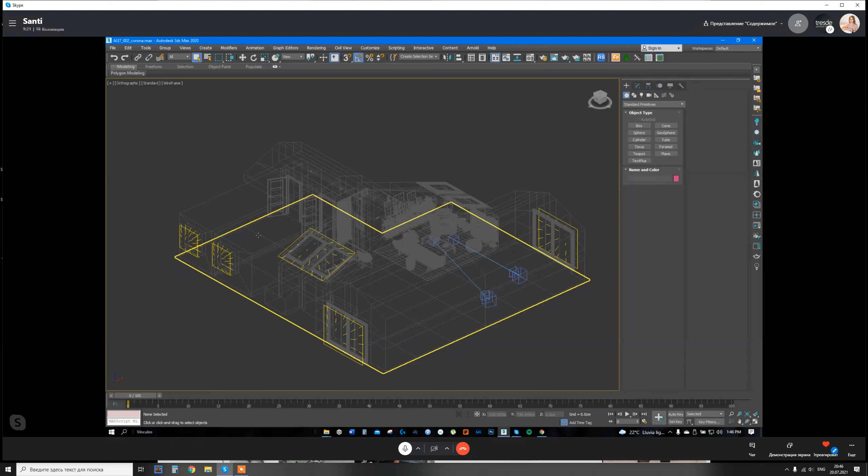What's really interesting about this project is that I decided to use this scene from Evermotion, because if you pay attention, it's the full flat model, like the full apartment. We have the room, the bedrooms at the background, here the living area, and here on the left is the kitchen area. It's almost the full apartment.

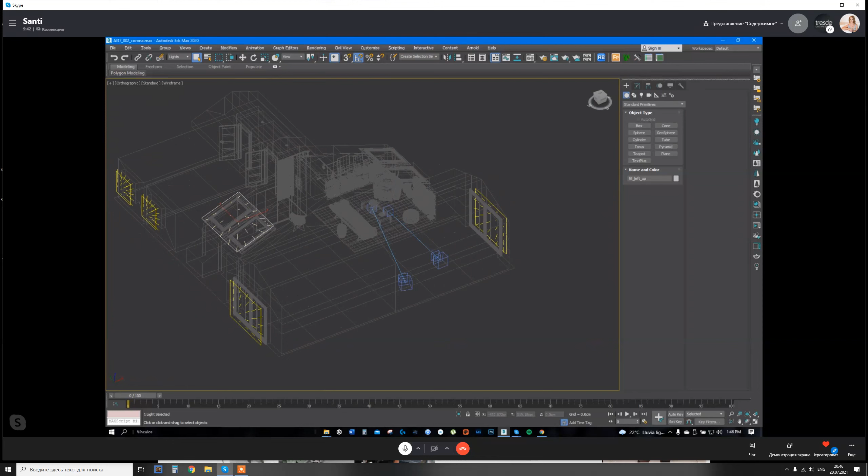As you can see, I already put some artificial lights in the light entrances, but plain. I didn't put anything here in the area where I'm going to take the render, which is the living area.

I think it will be maximum natural about the lighting, how it's going on by the place with the shape of architecture, because here is going to go inside the environmental light, the HDRI light.

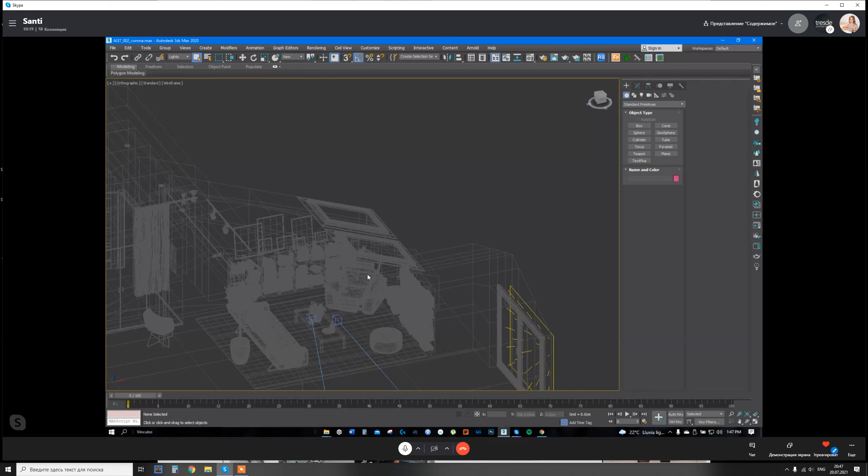That is the reason why I'm not putting anything here - the light from the environment, the HDRI, is going to go through these windows. For the other windows, I created another kind of lights, called light planes. I'm going to explain that right now.

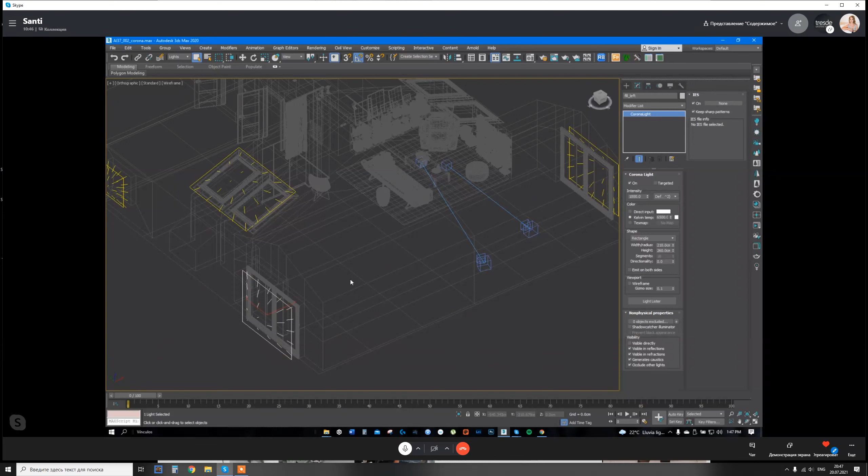These rectangle lights are called helper lights, or also fill lights. These fill lights help you control the light in a very indirect way, so it's not necessary to model the full interior. As long as you put these fill lights far away from the camera, and you don't see the light emitters in the composition.

This is the composition, but I'm not seeing the highlights directly. So in other words, don't put any light in front of the camera - just try to put it on one side, at the back, or in the upper part. The idea is these lights must affect the scene in a very indirect way.

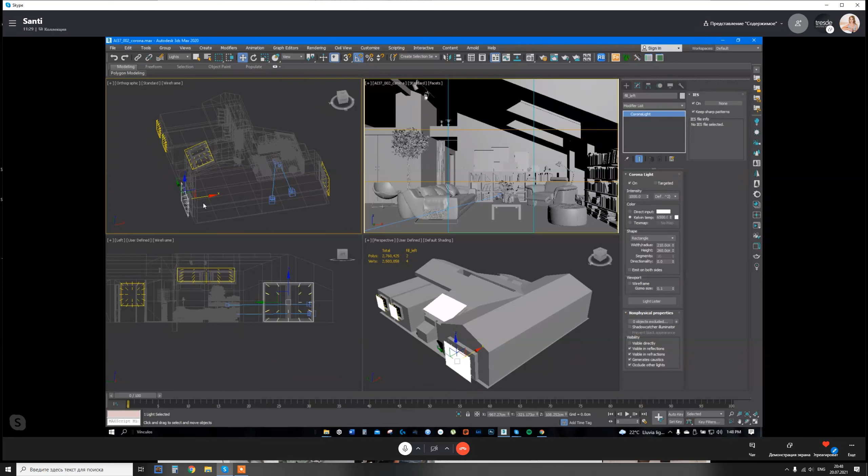The setup of these lights is very simple. We need to follow two things: first, the intensity must be really high, as you can see, 1,000. And the Kelvin temperature must be absolutely neutral - no warm, no cold. As an optional change, you can disable the visible directly option.

These lights are better when they are invisible. So I repeat exactly the same setup in all these lights.

Of course, I have lights in the ceiling like this one - little spheres. I have light here inside the lamp.

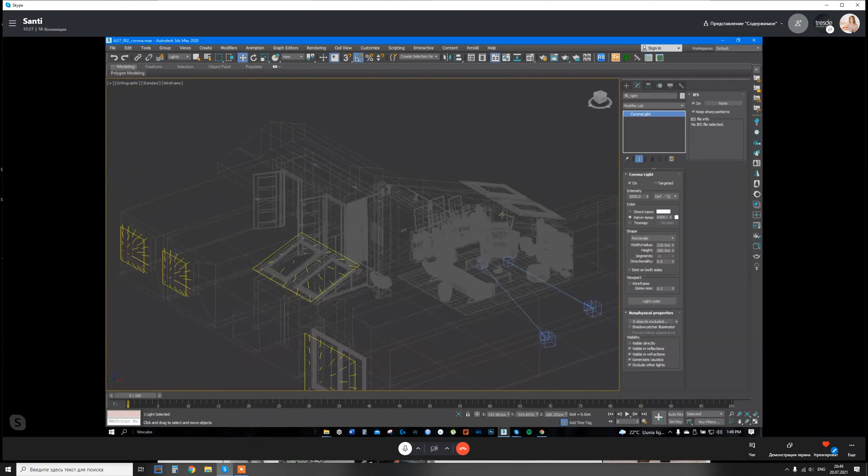It's important to give a name to every single light that you're going to use. For example, I call this one fill left up, this one fill left, this one fill right, etc. It's important to do that.

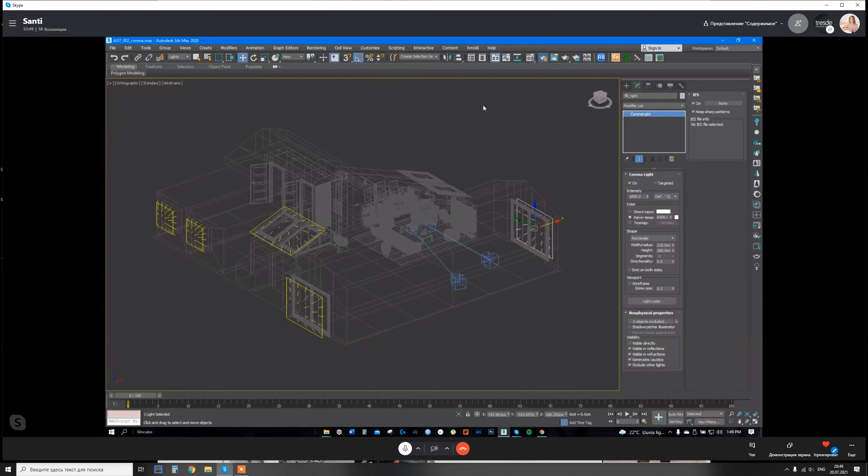Now let's jump to the Corona render setup. Go here, what says setup light mix.

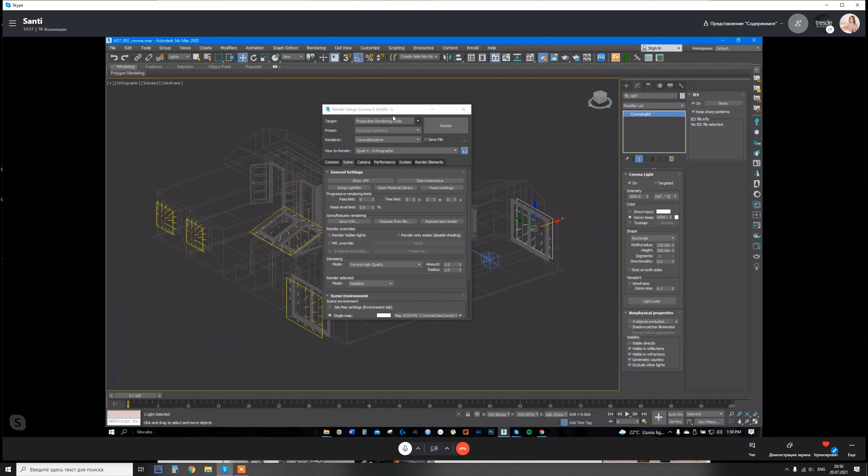So what is going to happen if I create a group? Let's find out. I'm going to group these four lights. Go here, group, give it a name. There you go.

Now I'm going to go set up LightMix again. And as you can see, when I'm working with group lights, I'm now using a little bit less RAM memory.

It's important to understand that the amount of RAM memory that LightMix is going to take will not be more than the actual RAM you have in your computer. For example, how much RAM do you have in your computer? 64 gigabytes? Okay.

If you see something here close to 64 - a hypothetical example, 60 or 65 gigabytes - probably what you need to do is start to group lights in order to optimize. But if you want to reach like 64 gigabytes of RAM, you'll probably have to create like a hundred lights in a single scene.

They will not take much, so you need a lot, a lot, a lot. So normally, is it better to work with individual lights or by group scene? By individual, it's better.

The problem when you work with groups, like these four lights that I already grouped, is that when you change the intensity or the temperature, all of them change at the same time. But if you work with individual lights, every single light is customizable, and you can put different intensities and different temperatures in every single light. Definitely work with individual lights - it's more useful, more practical.

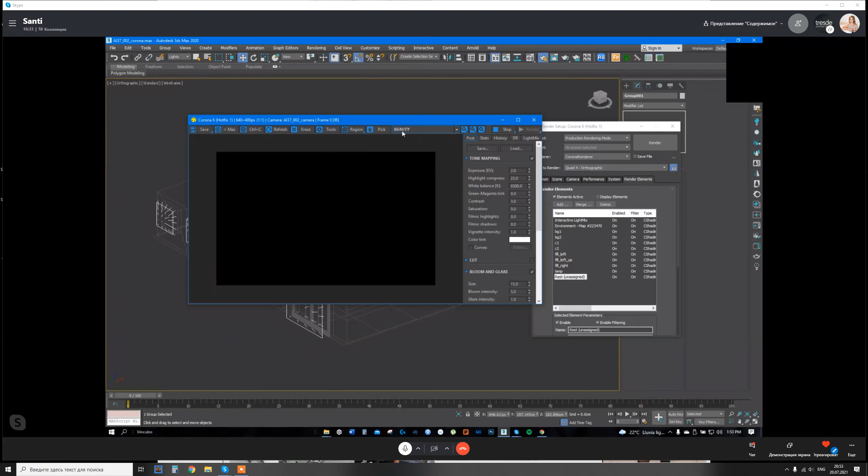Of course, we are not going to work in the beauty because we are going to sacrifice the beauty - if you remember, I've been using super high intensity values in the lights outside, so the beauty is not going to be useful this time.

What we're going to do is go to the LightMix channel here, interactive LightMix. And now what I really like to do is put everything to zero - that's what I like to do.

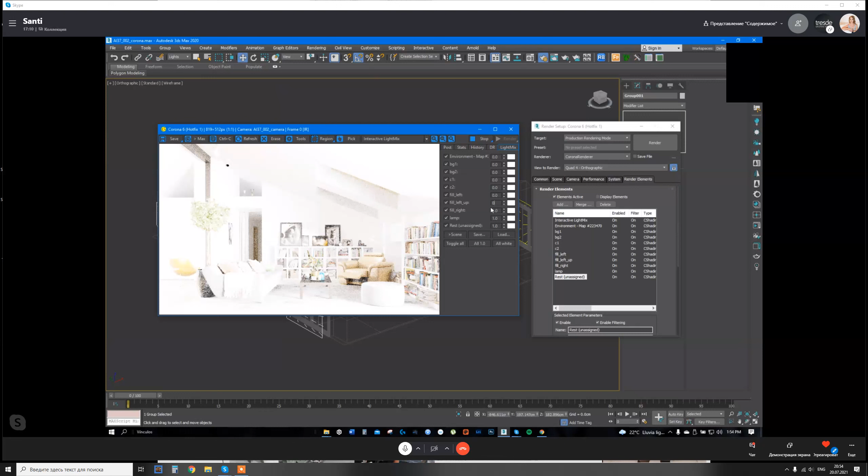Now you can start to create your lighting concepts from scratch by increasing the intensity here, etc. You can start to customize directly your lighting concepts here.

So if you prefer, you can do this as well during the rendering time. When you press through to the final render, you can start to create your lighting concept, but it's really important to save - after you are happy with the results, save the presets here in LightMix, and save the presets you have in the tone mapping or post-production tab.

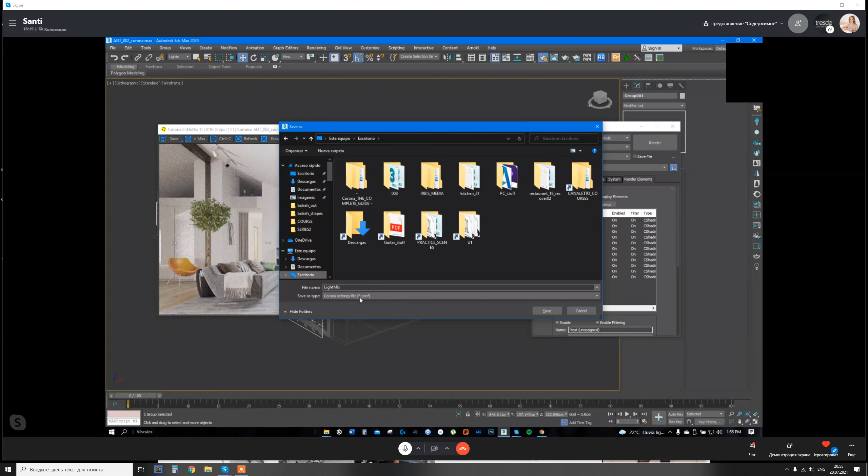It's super important to save, but be careful with these buttons - by post, save, and for LightMix, save. At the moment you're going to save, for example, LightMix, you need to be sure to give it the proper name, because the extension is .conf. If you save the post-production options, it's also the same extension, .conf. So it's important to give it a different name in order to understand which one is for LightMix and which one is for post.

And the third option to work with LightMix is to wait until the rendering is done, until the rendering is finished. And you must save the final image as a CXR. In order to save it as a CXR...

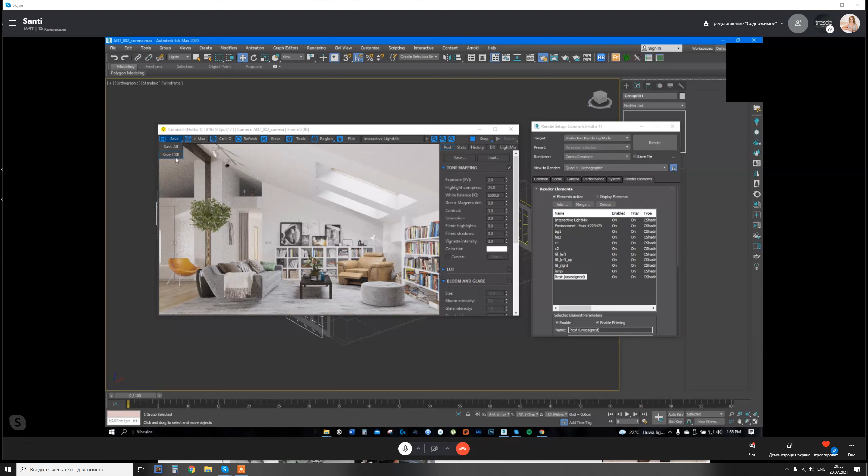You keep pressing the click on the mouse, and there you go, save as a CXR. I have a tradition every time to save as CXR, only to be sure if something goes wrong. And that's it.

Simple as that. Now, yeah, tell me. Maybe it will be an answer. My God, in English, answer. Maybe it will be answer after, so I will ask you after. Maybe you will say.

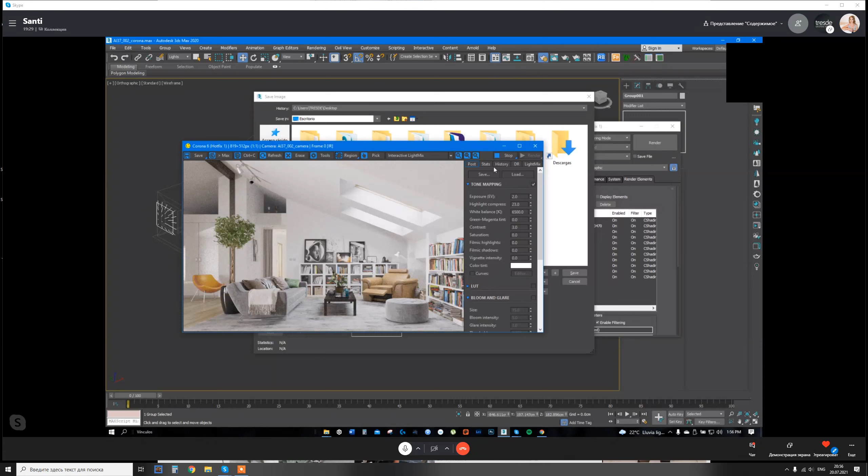So what we're going to do right now, I'm going to stop all of this because, as you can see, it's really simple to set up. For the lighting of the environment, I'm using the technique we learned before. Do you remember the overcast HDRI with the Corona color correct? It's the same technique, over and over again.

So what is new is just putting these hidden lights, these fill lights. That's the new part. And remember, these fill lights must have a super high intensity value, and must be neutral. For what conditions do they need to be maximum powerful in intensity? I'm going to explain. That's a super nice question, let me explain in 2 seconds.

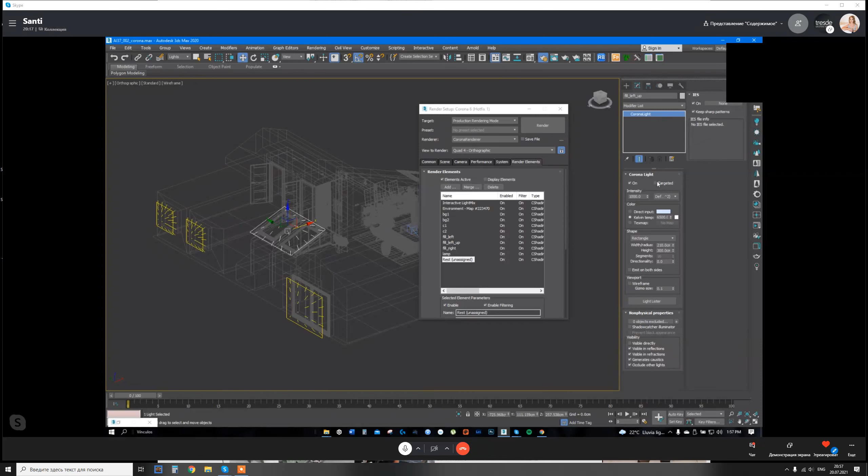So why is it so important to give a good amount of intensity to the lights? That's the question, right? Well, the answer is because the number that you put in 3ds Max - whether 50, 500, 1,000, or 1,000,000 - here it's going to be equal to 1. Okay? There you go, you understand, more detailed, with the exactly options - exactly.

So right now, if I go to the fill light and put 1, I'm going to have 1,000 of intensity, right? But I don't need 1,000, it's just too much. So I'm going to reduce, reduce, reduce until I feel happy.

So now the technical explanation. For example, here in the lamp, I think I put a really low value in intensity, like 500. So if I put here 1, this is 500, the maximum amount of exposure in the light. But if you feel that's not enough and you require more powerful intensity, you're going to put 2, 3, 4, 5, 20, 3,000, whatever.

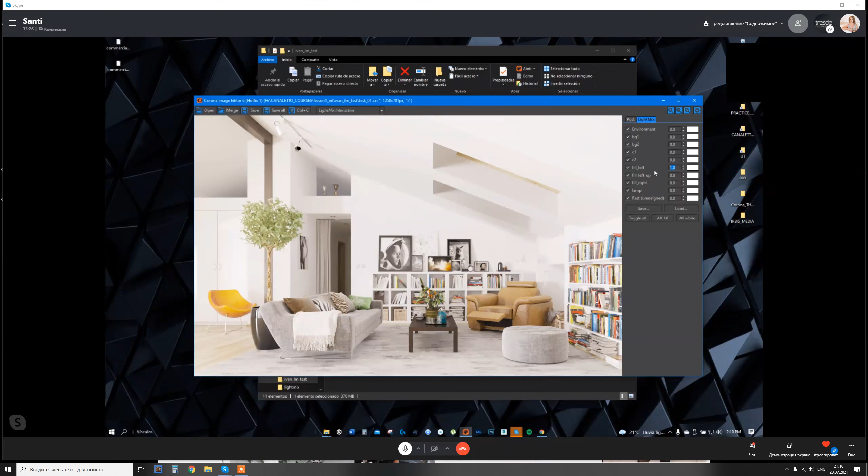Yeah, sadly, Santi, it doesn't work as a system when you click near these symbols for up and down. Yeah, exactly, it works, this is going to put 1. Yeah, if you right click, it's going to be 1, yeah that's the problem, it's every time by zero. I don't know, it's funny. Yeah, zero is better because it allows you to start more accurate, but when you right click on this sign, on these symbols, sadly it's going to take you to 1 by default.

Great, okay, so let's do a beautiful blue hour. Okay, I need the help of the environment, I need to change the temperature in the environment. I'm going to make a cold environment, right? There you go.

Not too much saturated, probably something like this. Is this painting now with the HDRI map or not? Or only painting by environment like a simple environment? The environment is with HDRI inside.

Yeah, you are painting the HDRI, so it will work the same exactly. Right now I'm changing the color in the HDRI. It's not neutral anymore. Right now I'm creating like a bluish purple HDRI.

So now I'm going to go in the fill left and I'm going to give it a little bit of touch of warm light. Enable it a little bit.

So, duplicate, you can drag and drop. I'm not going to use exactly the same amount of warmth. For example, this warmth could be a little bit more reddish. You see, it's slightly different, right? Increase a little bit the fill left up, and there you go.

I have a beautiful warm light from the kitchen. Can you see the transition? How beautiful it is from warm to cold?

Probably this one I'm going to make it not purple, but I'm going to make it slightly more bluish. Probably it could be like this. There you go, I have it.